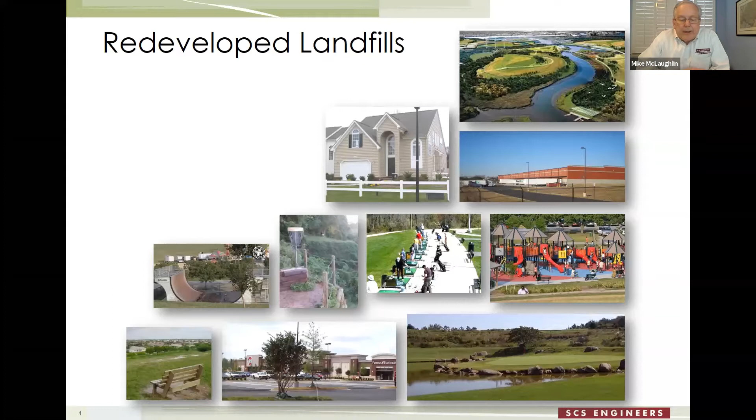I've said that landfill redevelopment can be smart growth. I think that's because landfills are often near great highway access. That's one reason why the landfill's there. There's existing infrastructure there - all the kinds of utilities and so forth are often built out to landfills. And they sometimes resemble or represent the last land available in an area. Suburbs or even urban areas have grown out around landfills - they're some of the last large parcels of land available.

I think also that landfill redevelopment can improve the care of landfills post-closure. Most regulations require a quarterly site visit to see if the cover is doing all right. Well, if you have a shopping center on a landfill, people are there every day. If a hole develops in the cover, the management of the shopping center will hear about that pretty quick and will take responsive action to deal with those kind of issues. So I think landfill redevelopment can be smart growth.

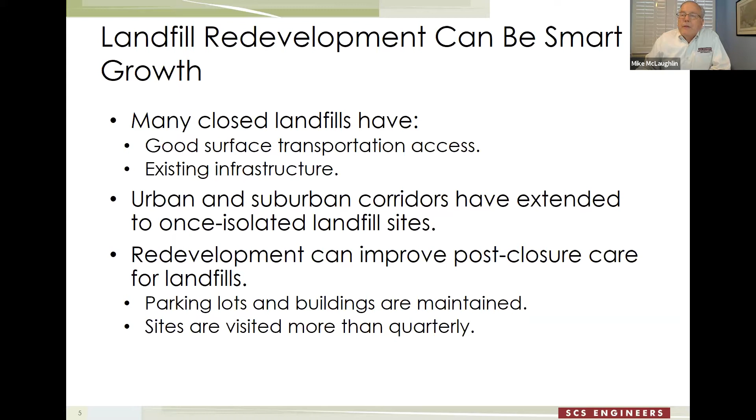There are three categories of challenges that I want to go over briefly this morning before turning it over to Eric and to Mark for some case studies. First, I want to talk a little bit about legal issues, because a lot of potential landfill redevelopers are struck first by the legal issues involved in these projects. Then we want to talk about some technical issues, primarily gas mitigation and foundation settlement. And I want to talk a little bit about costs, although costs kind of fall into two buckets.

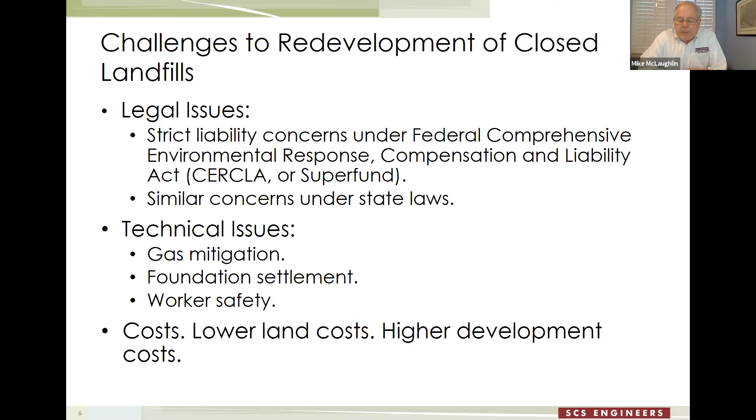On the one hand, it does cost more to redevelop a landfill. There are some features that you have to build in that you wouldn't have to build into a greenfield development. But on the other hand, you're buying the land typically for much less than you would be buying a greenfield nearby. So you have to consider costs in that total context.

With respect to the legal issues, we have a defense to the federal Superfund liability that can otherwise attach to site developers and site owners - a defense that is relatively new and has been successfully used. The bona fide prospective purchaser defense requires a few things to be present for the landowner to be able to use this defense. For one, the disposal of the site had to have been before he or she took title to the facility. They had to have undertaken all appropriate inquiries into the prior uses of the site, for example to find out that it had been used as a landfill.

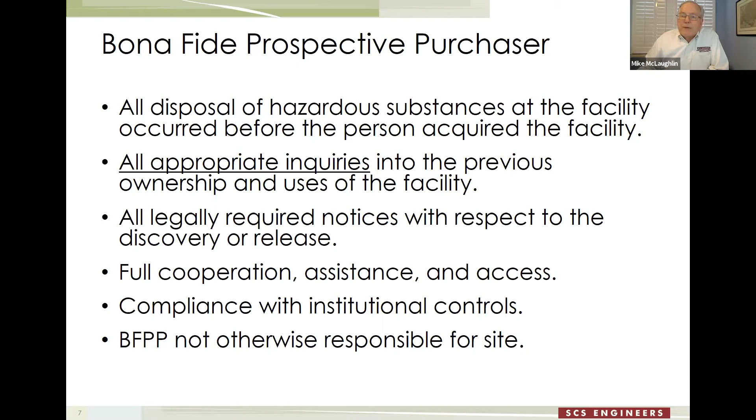You've got to comply with the institutional controls and essentially the regulations that apply to a closed landfill, which varies obviously from location to location and from landfill to landfill.

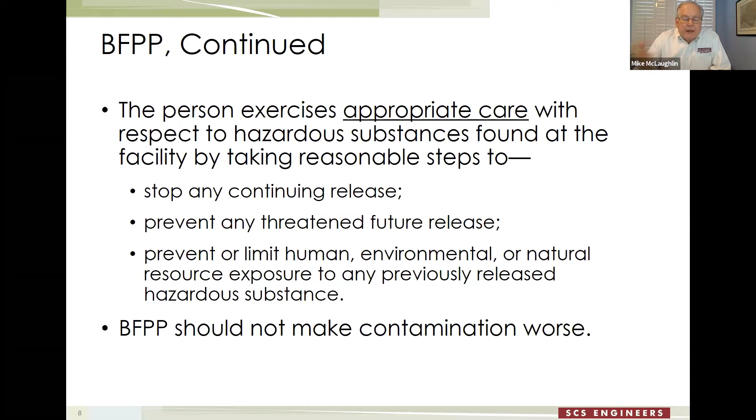You also have to exercise appropriate care with respect to the things you know about the site. That can mean stopping things like drums that are leaking on the surface of the ground. But really, what you want as a BFPP is not to make the contamination worse at a site. The idea is you don't move things from contaminated areas to uncontaminated areas, don't let things leak into wetlands, and don't make the contamination worse.

First, among the technical issues we have to address in many landfills are foundation and settlement issues. Depending on the nature of the waste, how fresh it is, and how much organic material it has, you're going to see decomposition and settlement over time. If the waste was placed years ago, there's perhaps less settlement; if it's relatively fresh, probably more settlement.

In general, it's not easy to use models to predict these things. It's better to go out and measure them in the old engineering way. We found that measuring actual settlement is the way to do this, and there are easy ways to do that relatively quickly that can get your arms around those parameters.

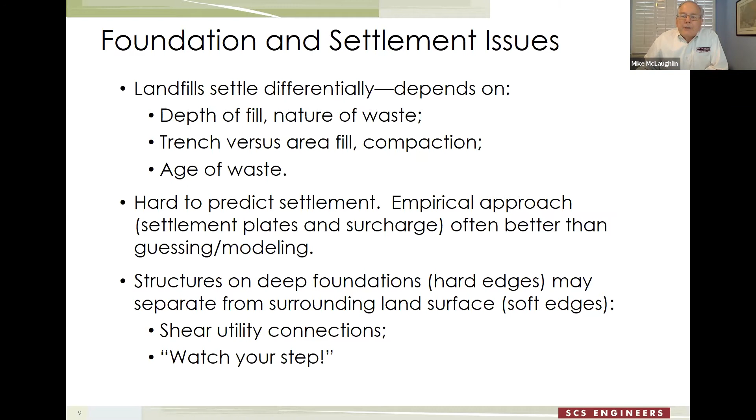We normally at least consider putting heavier structures on deep pile foundations. That can set up a challenge when the building is not moving but the ground around it is. So you've got the potential for a fall out at a building entrance if you're not paying attention, and the potential for utilities to shear off when the ground around the building settles. You've got to plan ahead for those kinds of issues.

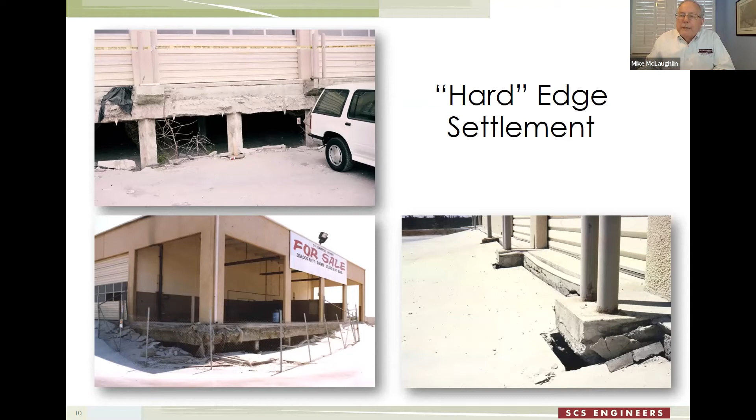In addition to that hard edge settlement, there's a soft edge settlement which can interfere with things like drainage. At Virginia Tech, they taught us that water wants to flow downhill. That's fine, unless the land has subsided and there's now a pond where there used to be a grade to promote runoff.

There are proven techniques for addressing these issues, everything from shallow footings and slabs to deep foundations with driven piles, grade beams, and structural slabs. We also can put in plastic grid reinforcement to minimize differential settlement at the surface. And we can improve the ground using either surcharge, a time-honored approach to loading the site so it accelerates settlement, or deep dynamic compaction, which we'll talk about in a second.

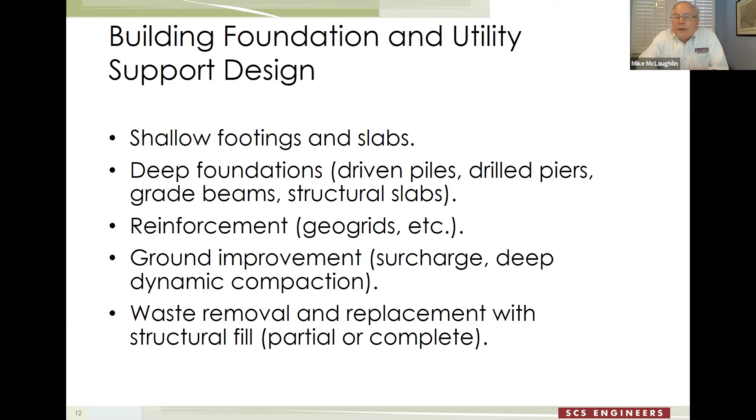I'll put this at the bottom of the list: it can be suitable for some sites to remove the waste and replace it with structural fill, which can be a pretty expensive operation, but certainly can be appropriate for some kinds of site developments.

One question we often hear from regulators the first time we talk about driving piles through a landfill is, won't this create a direct pathway or conduit for contamination to move further into the earth? The short answer is there are answers to this - there's some science and research out there that we bring to their attention. In terms of direct displacement, that's really a very low probability, since there's not much of a footprint that the pile has that can carry waste deeper.

In terms of a conduit, when you drive a pile through a clay liner, for example, you actually make the clay denser right next to the piling. That means there's actually less likelihood of leakage right around that more dense clay near the edge of the pile. If we use timber piles, though, there's potential for wicking, which could draw some contamination deeper.

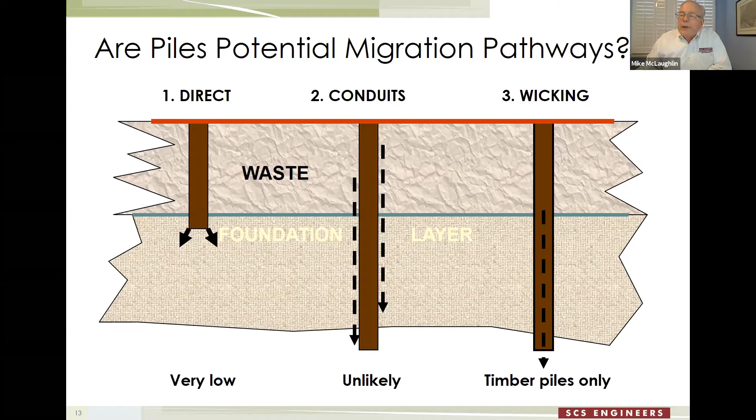I mentioned earlier that one of our concerns is planning for settlement so utilities don't shear off. Here are a couple of details on how that's done. We also want to protect piping beneath the slab of our building. We often hang those on hangers to keep them from moving - if the earth wants to slide or settle below it, we plan for that settlement and make sure our utilities stay in place.

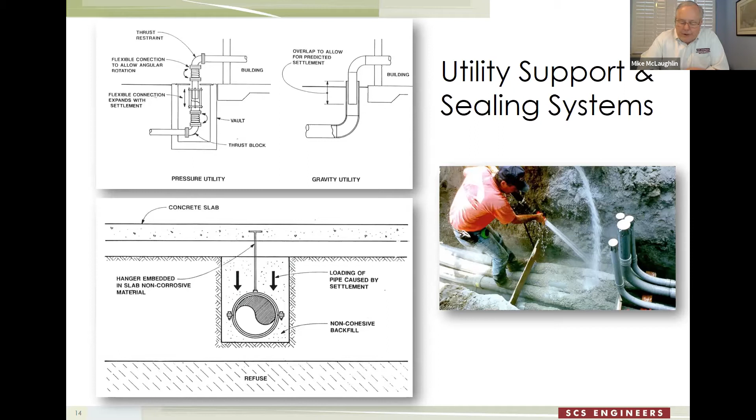A related concern has to do with bringing subsurface utilities onto a landfill site. The trench constructed for utilities can serve as a preferential flow path for migrating landfill gas. So we often construct bentonite check dams in those trenches to make sure gas can't move off-site.

Deep dynamic compaction is essentially a brute force method - it's like taking a large hammer and pounding the surface of the landfill. If you do that enough, you can actually have effects down 25 to 30 feet deep in a fresh municipal solid waste landfill. It's a good technique for near surface stabilization and works best on flat areas; doing it on side slopes can be challenging.

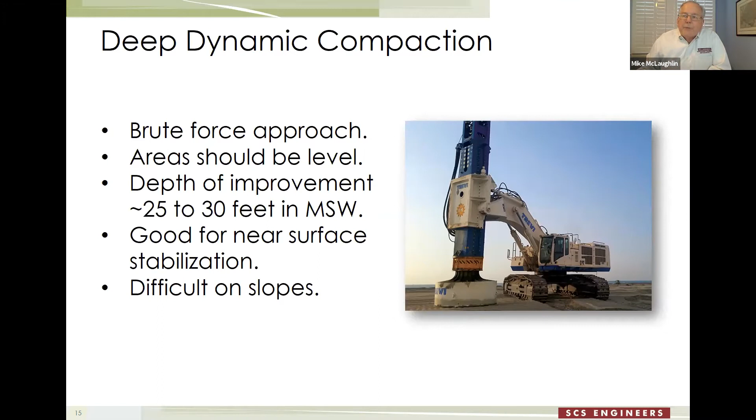What makes this a problem is that if you have an enclosed space collecting this decomposition gas, with oxygen present and a source of ignition, you can have an explosion. Explosions happen every year somewhere in the world. There are decomposition gas explosions, and people have been hurt from those explosions.

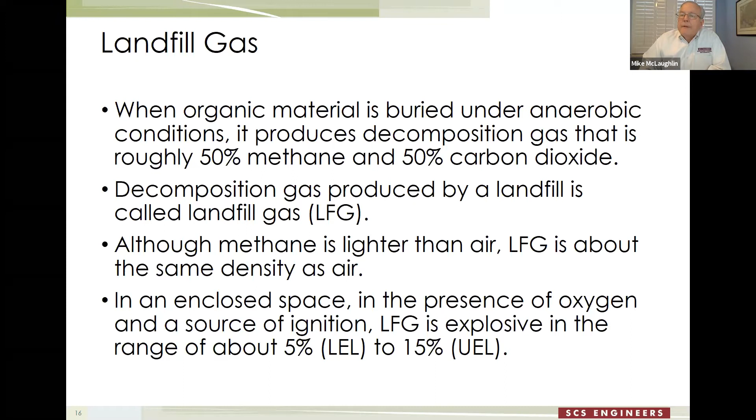When gas is produced very rapidly and has not much room to spread out in the subsurface, you can see pretty substantial pressures build up, and those pressures can drive gas into structures. Where you have a lot of gas being produced and a lot of pressure, you've got a different kind of challenge than if you simply have diffusion or concentration-based migration. If you have sustained pressure in the subsurface, that's a different challenge.

In addition to pressure, we also care about how much methane is in that decomposition gas. Obviously that matters, and the regulations focus on gas quality, for example.

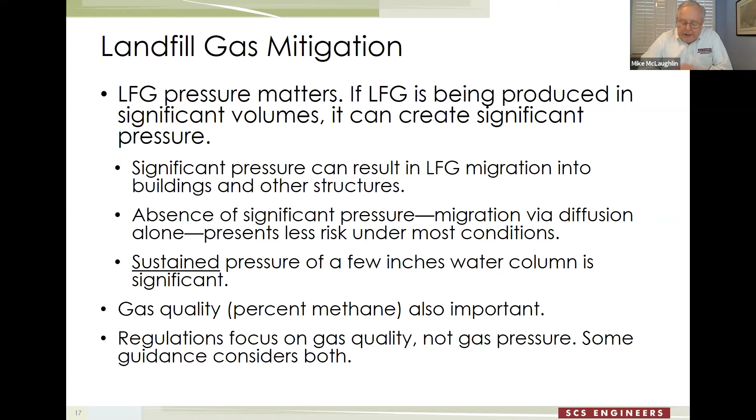There are lots of proven approaches to solving the landfill gas challenge at sites. I first want to put a caveat out there: there's a whole separate webinar we should have on trace contaminants, trace chlorinated solvents that might move up from contaminated groundwater into structures. Some of the technologies are similar, but that's a completely different subject. What we're talking about here today is landfill gas mitigation.

We normally have several techniques available to us. We can passively vent landfill gas from around our building. We can put in membrane barriers, or a combination of passive venting and membrane barriers. And if enough gas is being produced, we can supplement those techniques with an active subsurface subslab ventilation system.

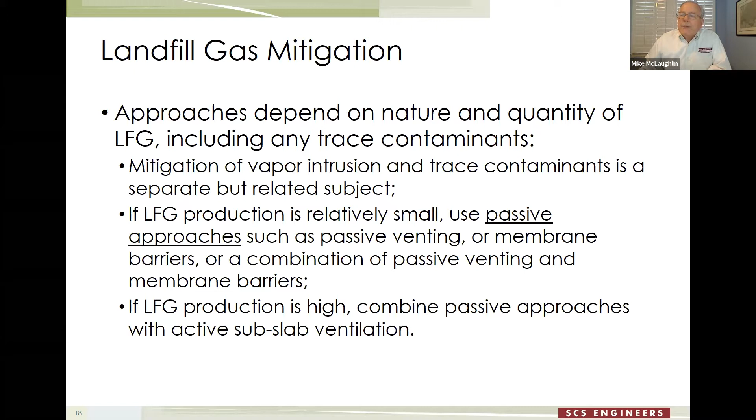In our experience, a lot of our landfill redevelopers take a belt and suspenders approach to mitigating landfill gas. They will put in both a barrier and a venting system and active ventilation, even if the situation wouldn't technically require it, and all of that is fine. It is a little bit of a challenge operating blowers around the clock. Some of our more recent systems have pretty sophisticated controls that only turn on the blowers when they're needed, and when there's methane there to be swept out of the subslab.

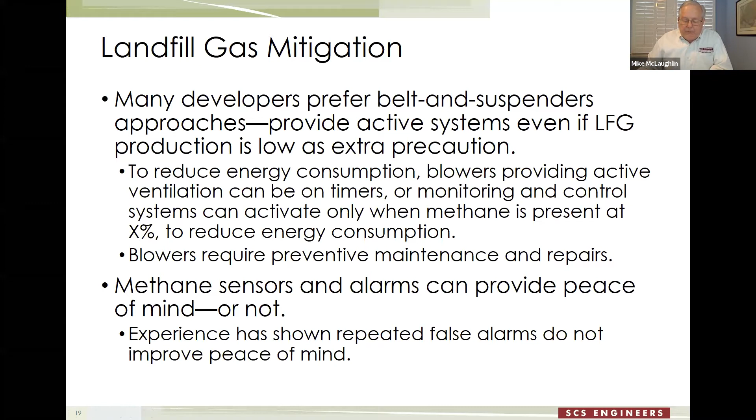Alarms are very popular. People like to put sensors and alarms in buildings as one more layer of protection. They can provide peace of mind, or as I say on this slide, or not. False alarms don't provide peace of mind. What they tend to promote is disconnecting the alarm, in our experience. But there are ways to minimize the potential for false alarms, and thus increase peace of mind.

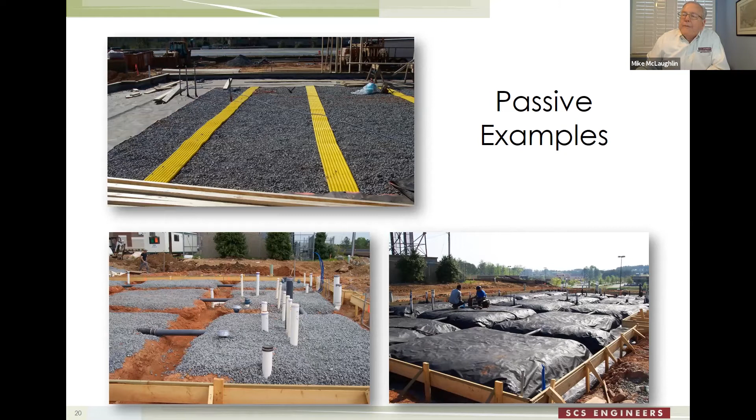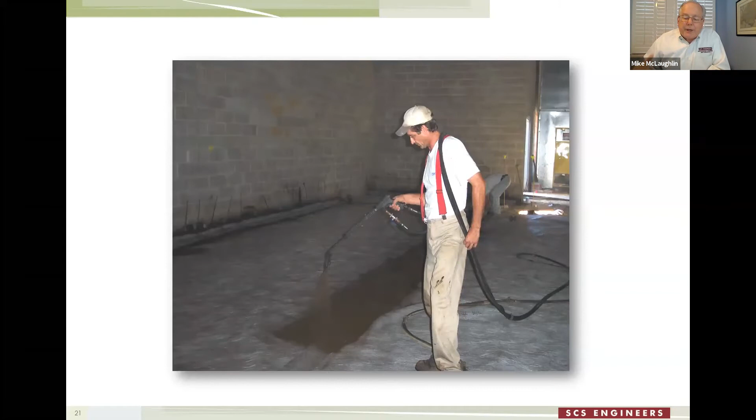Again, passive systems in that application - sheet membranes are pretty good. We also have had good experience with spray applied asphaltic membranes. This is somebody putting down a Liquid Boot from CETCO. It's basically built and fabricated in the field, and subject to separate construction quality assurance.

I'd like to speak very briefly about construction worker health and safety issues. Some of these old landfills date to a time when hazardous waste regulations weren't in place. There can be surprises - there could be industrial waste in some older landfills. It's just something to be prepared for.

Preparation is the best part of good luck, I think. You'll want to have a written health and safety plan for the people doing work invading the old landfill. You want to do some air monitoring to make sure they're protected, and have contingency plans in place in case they bump into something you weren't expecting to bump into.

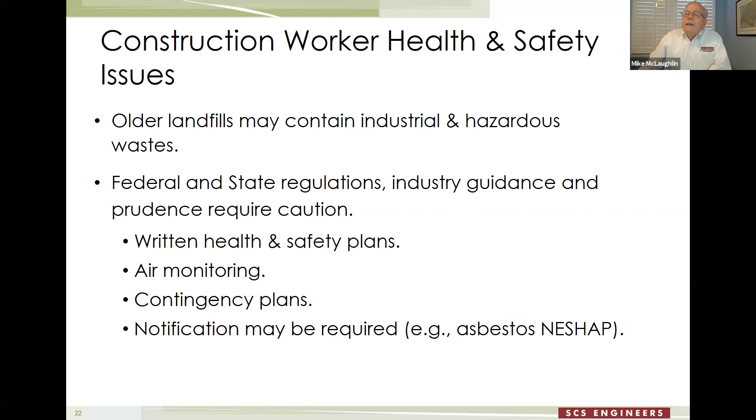I want to talk just a little bit about the incremental cost of developing on top of a landfill. Doing things like structural slabs and deep pile foundations can add expense to the construction. Again, you've offset that in theory by the lower purchase price for the land. Deep dynamic compaction's got a cost associated with it.

Putting in gas protection systems can add a few dollars a square foot for the first floor square foot area, and if you add ventilation to it, that can add some additional expense. And then just in general, you put in a little more money for things like maintaining parking areas, because instead of having to repave those every 10 years, for example, you might be repaving them every 7 or whatever the case may be.

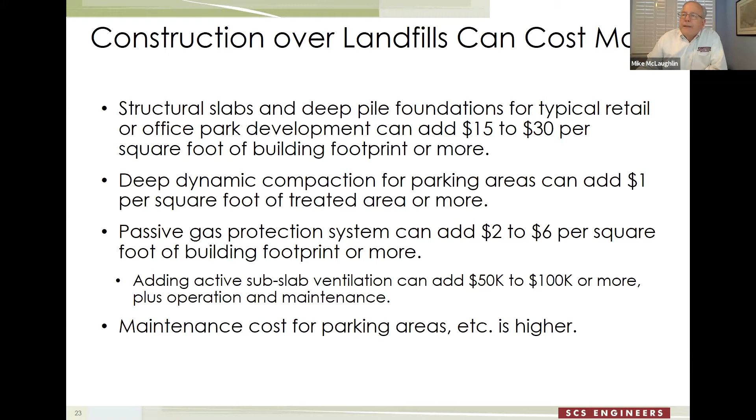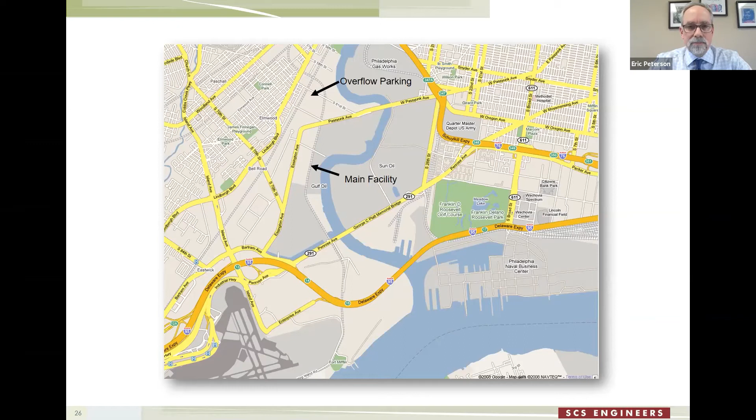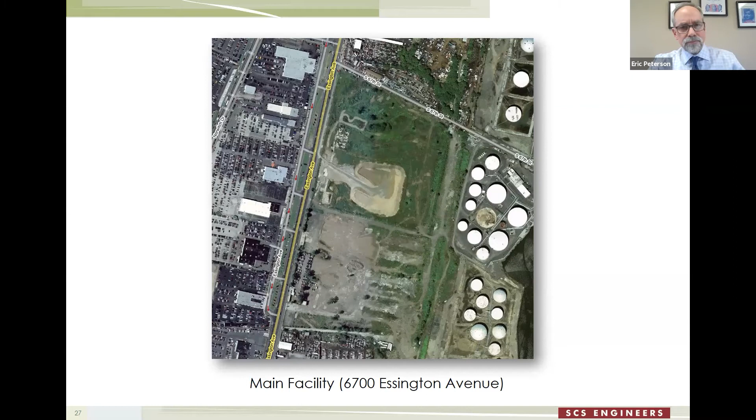The location of the facility, we're talking about landfills. I call this more of a junkyard slash construction debris landfill. This is a pre-development photograph of the area. The site is about 50 acres, half of which was landfill material, 15 to 25 feet deep.

The previous consultant did a series of test pits and monitoring probes, as you typically would do. They found methane in the 50% range, slight pressure. I should point out that no matter how old or how little organic material you have, the microbes are still going to produce it at, in the 50% range. So we've worked at sites in Alexandria from the old canal that was filled 80, 90 years ago, but there's still 50% methane being produced, just in very, very small quantities, which then results in low pressures and certainly factors into the hazard level that can develop.

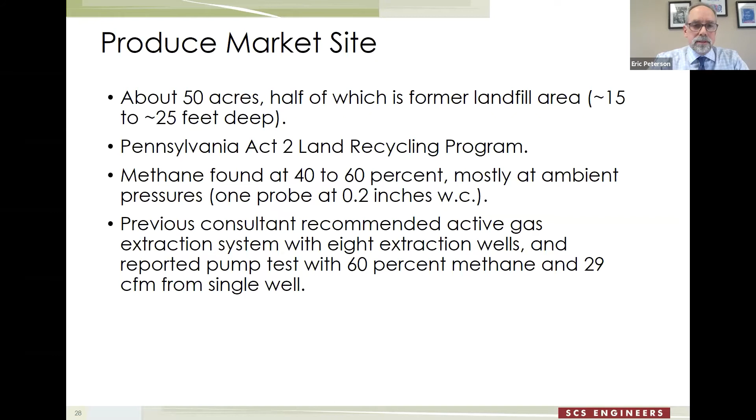For this site, we found very little pressure and weren't anticipating a whole lot of gas generation. We modeled that about 80 CFM would come from the entire site. So although there was a recommendation by the previous consultant to perhaps install vertical extraction wells to remove the gas, that's a challenge for a couple of reasons. One is with a building this size, over 500,000 square feet, it'd be difficult for vertical wells to influence beneath the building, and also you introduce the possibility of air permitting if you're going to extract gas in that manner.

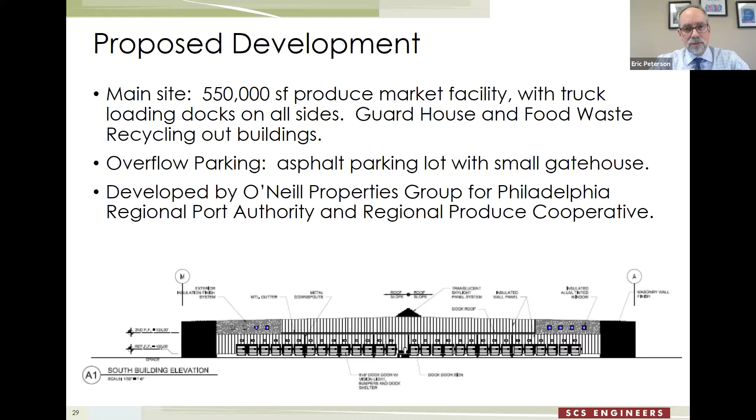As shown here is sort of an architectural rendering. There's a large building with truck loading docks on all four sides.

In this next slide, we discuss the type of construction it was.

Originally, it was going to be supported on timber piles. As Mike mentioned, on a pile foundation you're supporting a structural slab which is independent of the soil beneath, so the soils can settle with the waste below it, independent of the first floor. This creates a challenge not only for the utilities that need to be hung from the underside to keep them in place, but also if you're using sheet membrane, for example, that needs to be attached at the edges, and it ends up draping over the utilities.

You also have the added challenge of each pile having a pile cap or cluster of piles to support the slab and also the columns above it. So each pile cap creates a sort of detour for utilities running across the building, and it's also a point of attachment for a sheet membrane.

So normally, if we have a deep foundation and structural slab, a spray-on type membrane has a lot of advantages. However, at this site, the value engineering during the design process determined that controlled modulus columns, which are a combined auger grout injection process to modify the soil, sort of like concrete columns, were installed very close on center. At this particular site we had approximately 10,000 columns, and above that a 3-foot layer of engineered fill that allowed for a slab-on-grade type construction, which simplified matters for the methane remediation.

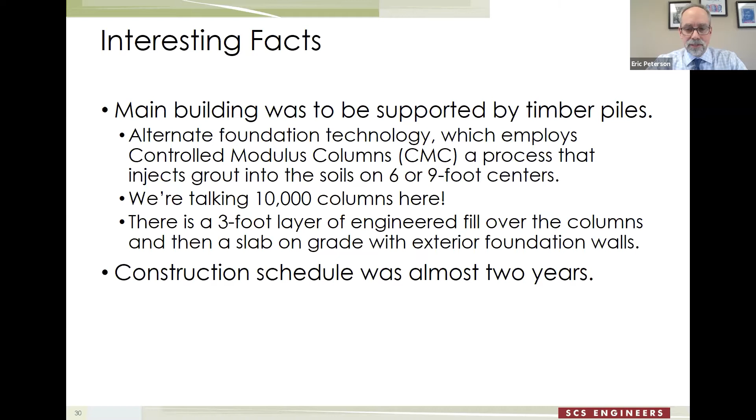The construction project was about a 2-year process.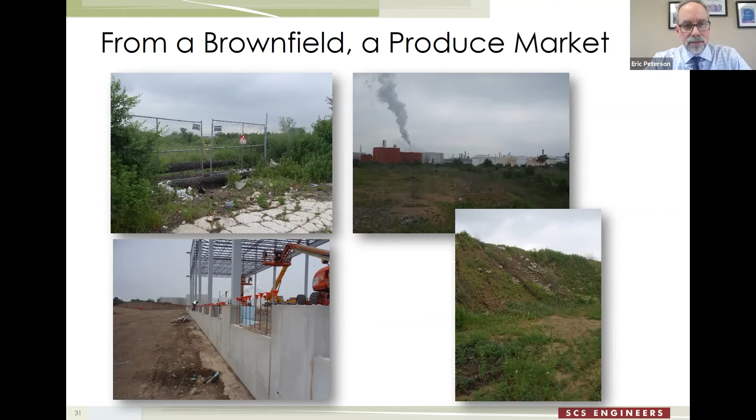Here's a couple of pictures pre-development on the top left, right, and bottom right. And then in the bottom left, you can see some of the earlier phases of construction.

In regards to the methane mitigation, we had, from bottom to top, a gravel vent layer, the membrane, and then the concrete slab, with vent piping in the gravel vent layer.

It's noted here that originally, when we were talking about a deep foundation, the spray-on membrane was proposed. When they switched to a shallow foundation, the membrane supplier determined he could use sheet membrane more economically, so that's what was installed.

As I'll point out in a minute, sheet membranes require a boot for every penetration, whereas with a spray-on, you're creating the boot with the spray itself as you go. This large building had many penetrations with conduits and utilities, plumbing and whatnot, each of which had to be booted. I'll show a few slides in a minute on how we structured the remediation.

We had vent piping that crisscrossed the building. Every other run of vents were connected to a manifold that in certain places would go up to the rooftop. We had a series of 4 blowers on the roof to apply an active vacuum beneath the slab. Every other cross vent would go to a different manifold that had a series of vents along the loading dock as fresh air inlets, so that in active mode you'd be flushing clean air through, pulling it through the subslab gravel layer to remove any accumulated methane.

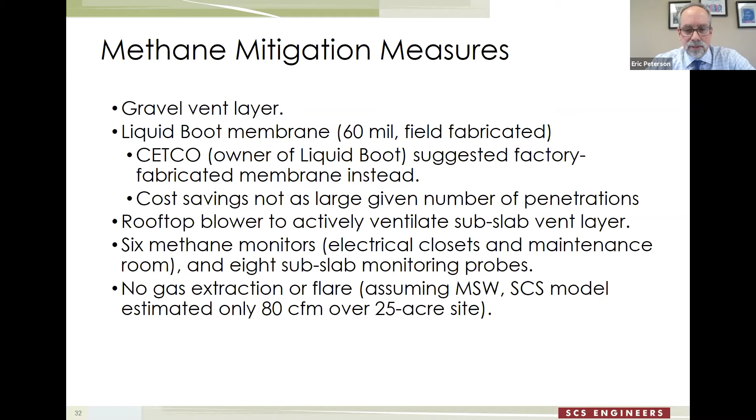You'll see in these pictures different sequences of construction. On the top left is the beginning of the gravel layer. You see the white pipe along the left side is one of the manifolds I spoke of.

The gray ribbon-looking thing in the lower left of the upper left picture is a geovent type venting device that ran across the building the short way. The next picture is the completed gravel layer, with the dark material being the protective geotextile and the shiny material being the membrane, and a more full picture of the membrane deployment is in the lower left.

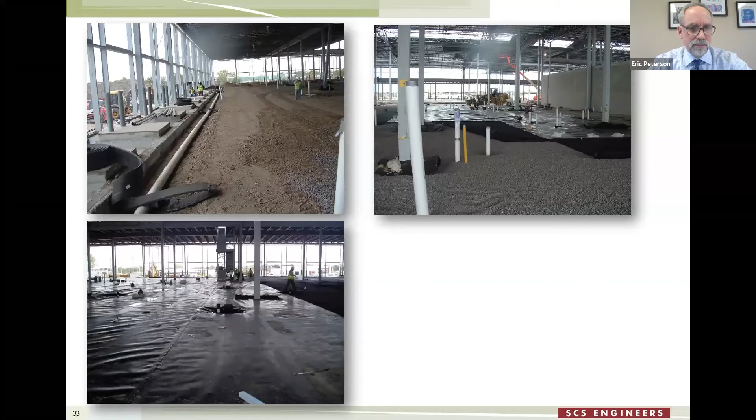I mentioned that we had a series of 4 blowers on the roof. We ended up activating these, running them full time. Here's one of the 4 blowers. You can see the refinery I mentioned in the background.

Besides this main structure, the 500,000 square foot structure, we had a guardhouse and a recycling building. At the guardhouse, the design called for the membrane passive venting through the roof. It was probably about a 600 square foot building, but it had a lot of telecommunication cable conduits coming in through a small communications closet and causing odors.

There were 3 large spare conduits where gas from the subsurface was coming in and causing an odor. So we ended up modifying that design. In addition to your belt and suspenders, we added an elastic waistband by having an interior ventilation fan that was sensor activated in this telecommunications closet.

We also made the passive vent active by putting a radon style fan on the vent piping through the roof. Even with all these things in place, membrane, vacuum applied through the vent layer, you still have one critical pathway that you need to control, and that is through penetrations of conduits and utilities that come up from beneath the slab into the building.

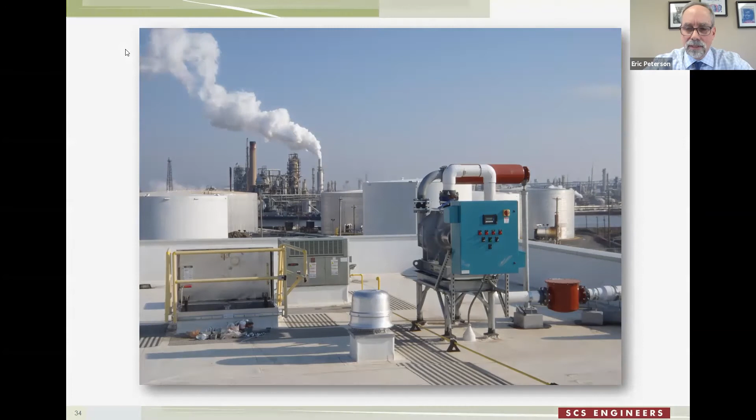Here, this gives you an example. At this site, there must have been several hundred conduit penetrations coming up through the slab. The picture on the left is just one bundle of conduits in one small section of the building. After the building was open, before occupancy, we were testing the sensors, and we had an alarm going off that we determined was coming from the conduit bank near the elevator shaft.

You can see on the right, these are conduit seals. Every conduit, because they're not gas tight and methane can get into them as they run beneath the building, needs a seal installed, which is like an epoxy between the conductors and the conduit to block the methane, otherwise you can have a leak. Well, the contractor forgot to install that epoxy.

In the second from the right seal, you can see there's a little bit of drippage from it coming in after the fact. So we put in the epoxy, which stopped the alarm, and we haven't had any alarms since. So just a note of caution that quality control and little things like conduit seals are something you really need to keep track of and make sure are installed properly.

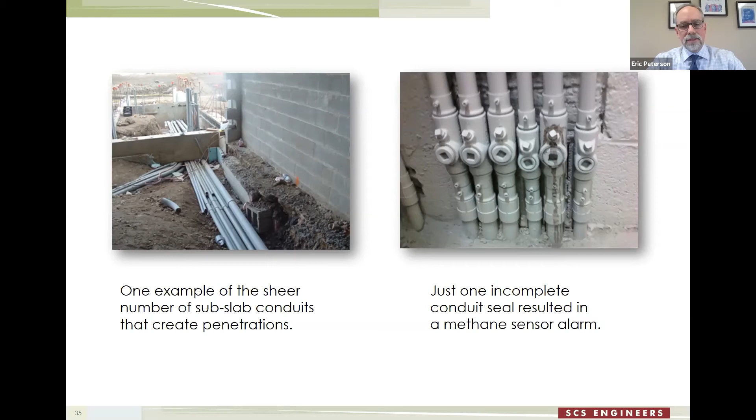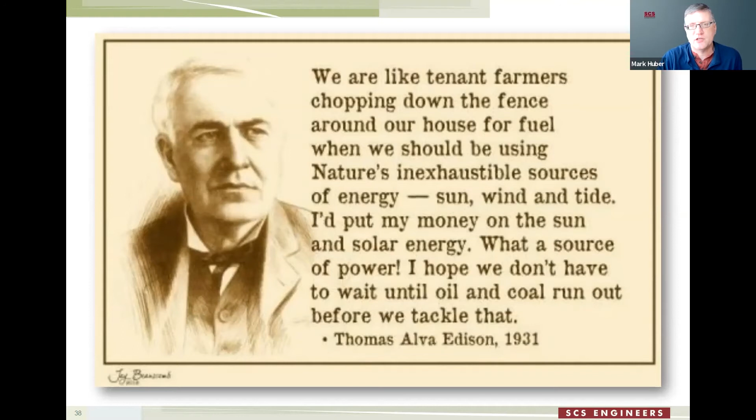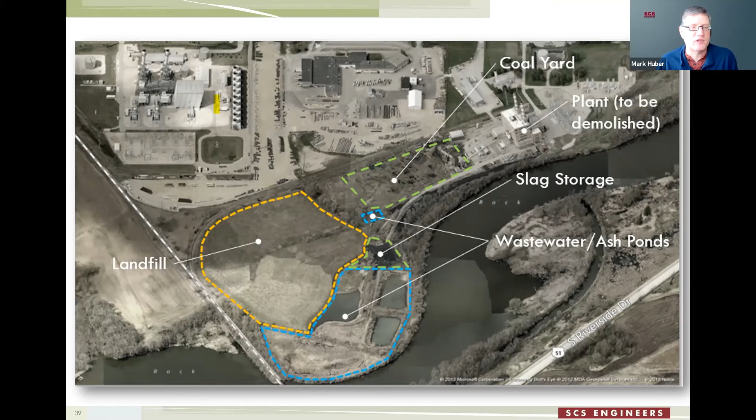When the boilers were running under coal, the ash material created from burning the coal was mixed with water to be conveyed out to several ponds over here. The ash material would settle to the bottom, and the clean water would go off the top and into the Rock River. Over time, the ash would accumulate in the ponds, and it would be excavated, dredged out of these ponds, and then placed into the landfill.

The coal-fired plant ran for almost 50 years, was eventually converted for a short period of time in 2000 to a natural gas-fired plant. Then starting around 2012 through 2016, the plant was decommissioned, the ponds were closed, and solar was installed on the landfill.

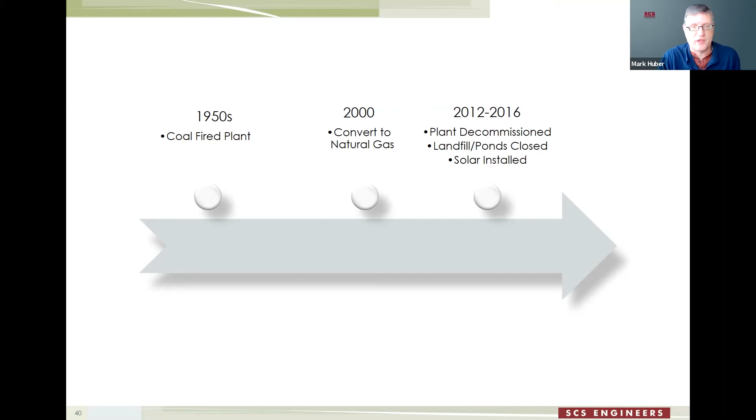Anytime we're looking at redevelopment on a landfill, there's really two basic questions we need to ask. How does the landfill affect the development? And really the flip side of that, how does the development and the construction that goes with it interact with the landfill?

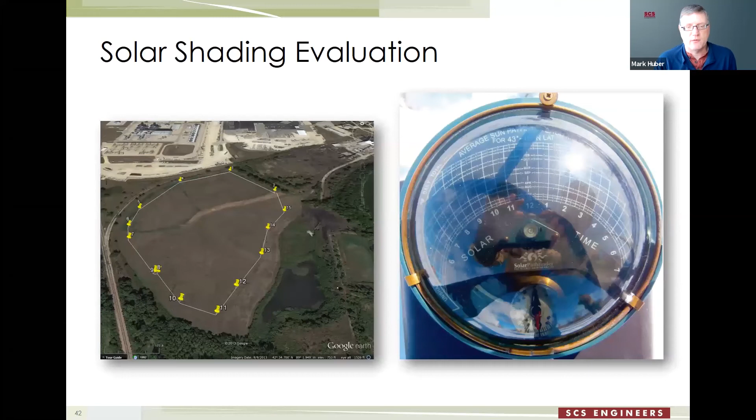On this site, we started to answer those questions by first looking at the feasibility of solar on the site. The instrument on the right-hand photo is a solar pathfinder. You just take that out to the site and walk around with it and measure the angle of the sun and determine how much energy you'll get. You're basically looking to see if there's heavy shading that would obscure the panels and reduce their effectiveness.

While we were walking the site on a very cold day here in Wisconsin, doing the solar pathfinder work, we observed a lot of condensate coming off that natural gas-fired plant, and we were a little concerned that that might cause some shading. So we did a quick little wind study. As you can see here, the prevailing winds out of the west were blowing the condensate away from the solar facility and would not cause a major concern in terms of reduced electricity production.

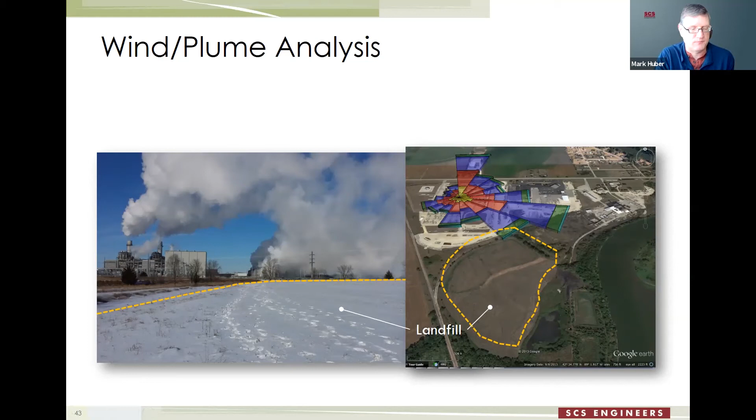So once it was determined that solar was probably a good thing to try at this site, our client Alliant went off to recruit a solar developer and asked us to start working on a plan to close out the coal yard, the ponds, and the landfill.

So our primary mission was to take the coal and dirt that was left over from the coal yard, as well as residual materials in the ponds, and consolidate them with part of a closed landfill and then what became a new landfill. The trick here was the volumes of those materials are a little uncertain, so we had to have some flexibility in our grading plan so that cover could go up or down based on the final volumes of material moved during construction.

At the same time, we needed to make sure that the grades of the landfill were ready for solar, so we needed to make sure those grades were between 2 and 10%. We don't want anything too flat or too steep for solar. And we weren't looking to put solar on the steeper 4-to-1 slopes that we needed to make a couple of transitions.

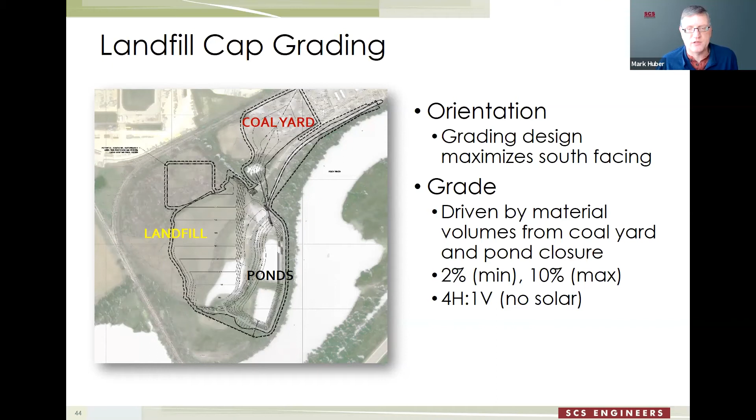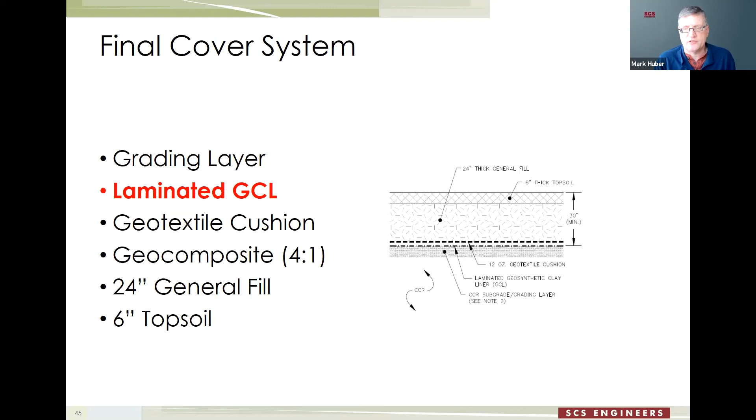The final cover system for the landfill, once all the materials were consolidated, consisted of these layers. The most important, the queen bee of this, is a laminated GCL, or geosynthetic clay liner. That's some clay sandwiched by 2 geosynthetics, and then for extra protection, this one has a membrane applied to that GCL. I have a series of slides here showing the GCL going down on top of the landfill.

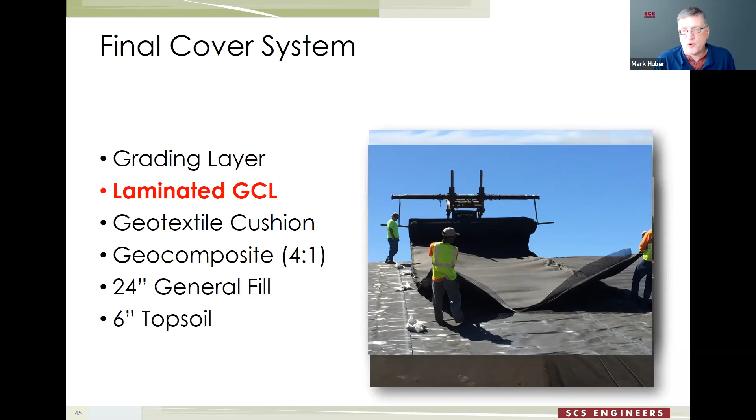And then just a protective geosynthetic going on top of that. On the steeper slopes, we had them roll out some geocomposite and a drainage layer that we'll take a look at in just a minute. And then finally, we put on a fairly thick 24-inch general fill. That's often called a rooting zone. It allows the roots on the cover above a place to go so that they don't penetrate the cap over time.

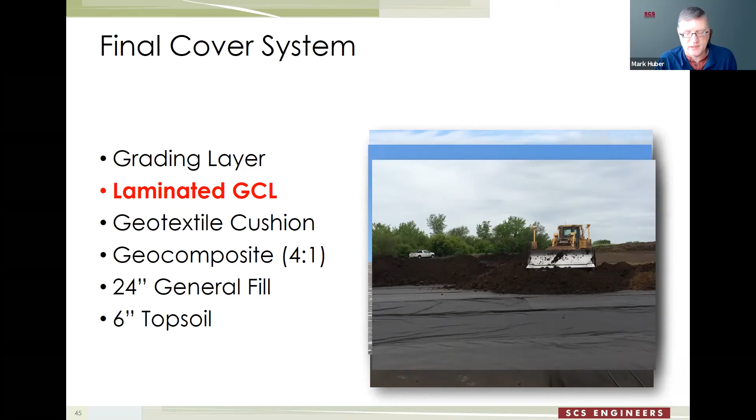The main point here is that the stability of the landfill cover was really important. We wanted to make sure that we didn't lose the cap itself down into the pond below, and we certainly didn't want to lose any of the solar panels that were about to be installed on it. So that drainage layer was installed on the steeper 4-to-1 slope so that when the rainwater hits the cap, it has a place to go laterally instead of vertically.

The function of the cap is really there to keep water out of the materials below so that they can't mix with the rainwater, can't mix with the waste, and then cause a groundwater problem down the road. So this drainage system helps manage that storm water that does hit the surface.

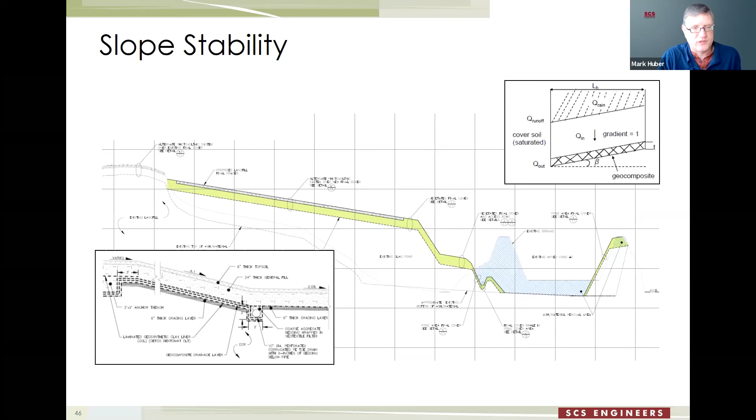One of the next big hurdles for this project was making sure that the loads of the construction of the solar system wouldn't impact that GCL layer. What we found out during the design is that the panels themselves have very little weight. In fact, the concrete grade beam that was installed to mount the panels on was actually serving more to make sure that the wind loads didn't topple over the panels than it was there to really protect the cap below.

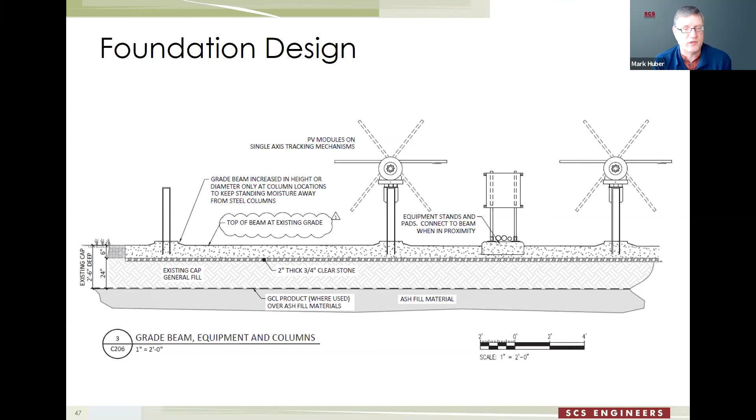In addition to the solar panels, there's some other equipment that got mounted on the grade beams. We're depicting here one of the pieces of equipment called an inverter. The solar panels collect energy in direct current, and that has to be converted to alternating current so that it can be used on the grid and brew our coffee and reheat our meals in our microwaves.

In addition to the grade beam that went on the cap, we did have a few places where we had to have some underground utilities. The main goal there was to make sure that those conduit runs were kept shallow enough that they didn't interact with that GCL membrane.

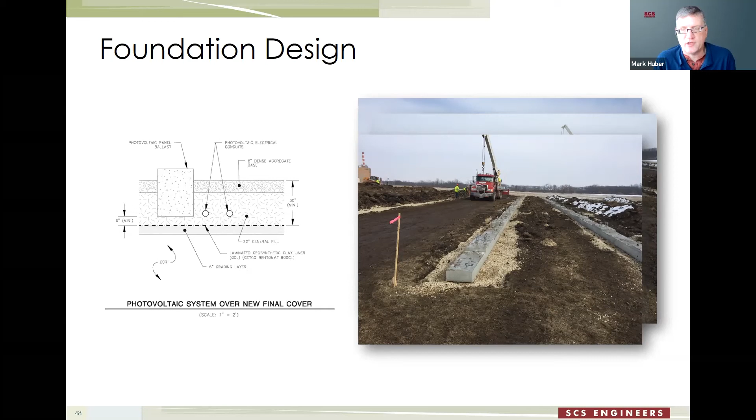One of the innovations the contractor came up with on this project was to pour the grade beams offsite in their yard, then bring them to the site on a large flatbed trailer and use a small crane to put them in place. That was a good way to minimize the loads and traffic on the cap while the solar facility was being installed.

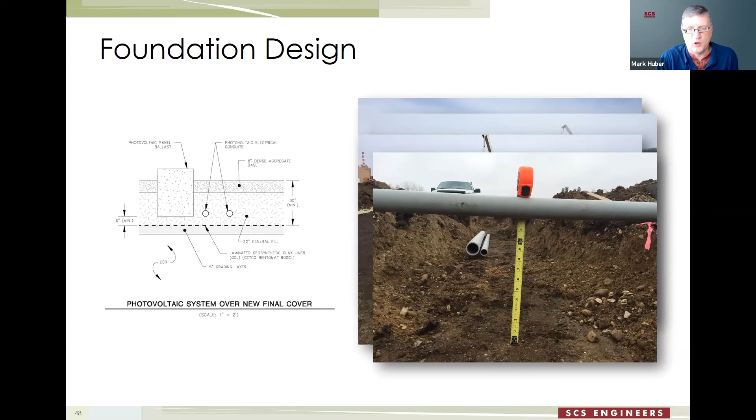Maybe not quite as interesting as the solar panels themselves, but site access over the top of a cap is an important consideration. We had to do some geotechnical analysis to make sure that the vehicles that would need to go on the cap to help maintain the solar system would not disrupt the cap, particularly that GCL layer. So we did some conversations with the solar developer and the local emergency departments to find out what size vehicles would be up there.

Turned out they were pretty light, and the road that we needed to put in didn't need to be too thick to support those vehicles. So we were able to have a fairly shallow road section.

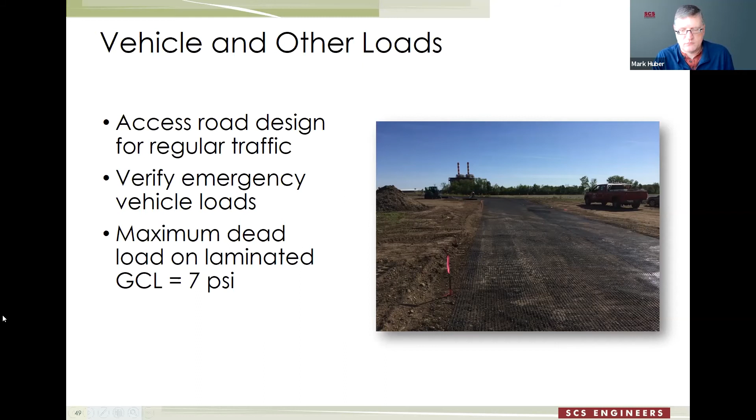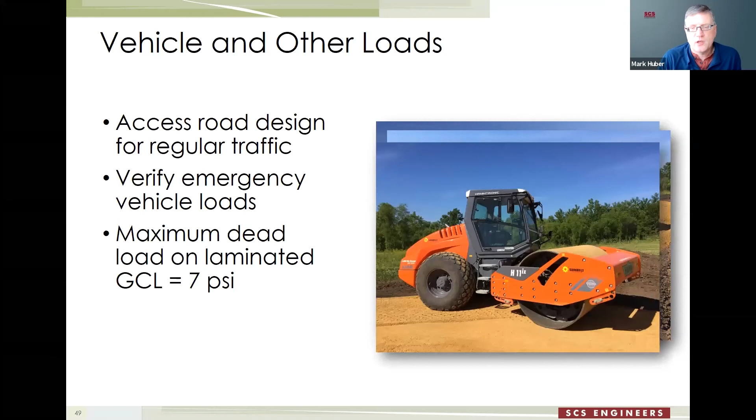Here's just the gravel being put out with some wide tracked vehicles so that it doesn't disrupt that GCL, and then a compactor pushing it down into the ground. And there's the final road.

Stormwater management is always an important consideration on any development. In this case, we were able to protect the cap with some good sloping away from the high to low points. We had a pond that was actually a former process water pond. The easiest way to get that pond closed out was actually to turn it back into a pond after we got rid of all the contaminated material.

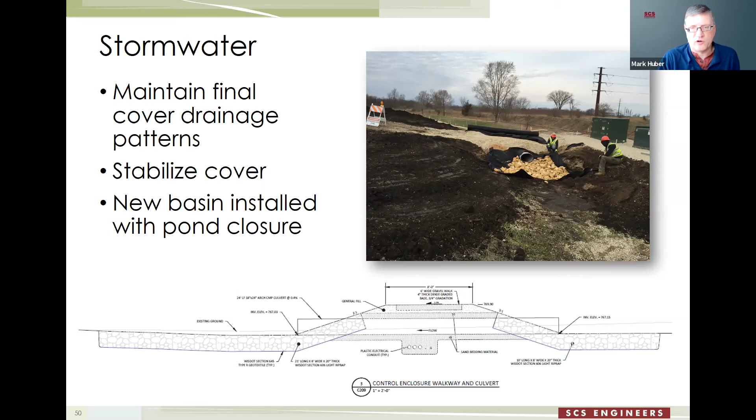In this case, we were able to use a conduit run, locating it directly under a stormwater culvert, allowing us to keep everything shallow and use the road that went over the top to get to the cap as a dual purpose.

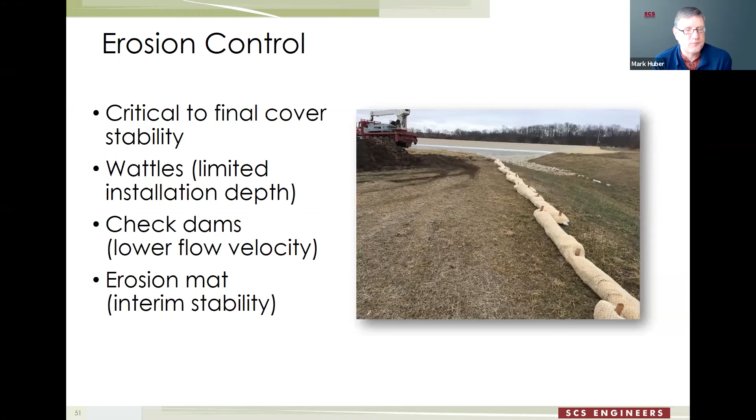Erosion control is really important before the vegetation on the cap is established. One of the things we used here was something called wattles, which serve the same purpose as silt fence, just trying to slow the sediment transport down. The advantage of wattles is that we just need to stake them a little bit into the ground, so we didn't get anywhere near the GCL layer down below. We also used erosion matting where water was being concentrated to keep that in place.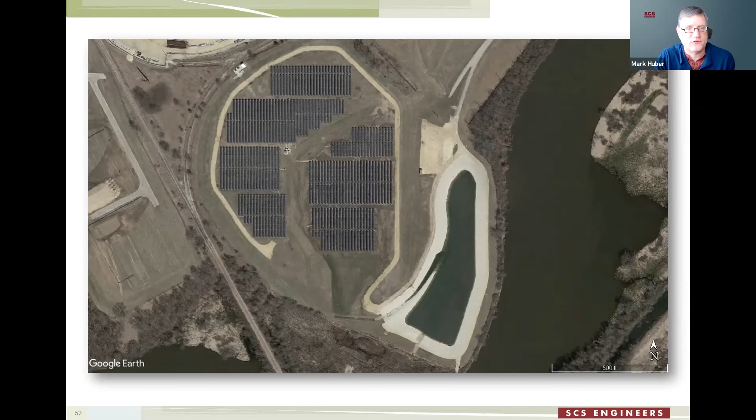So at the beginning of this case study, we were looking at two questions. Does the landfill affect the development? And we're able to firmly answer that question: no. The landfill and development get along quite well. We achieved a nice symbiotic relationship that we were looking for.

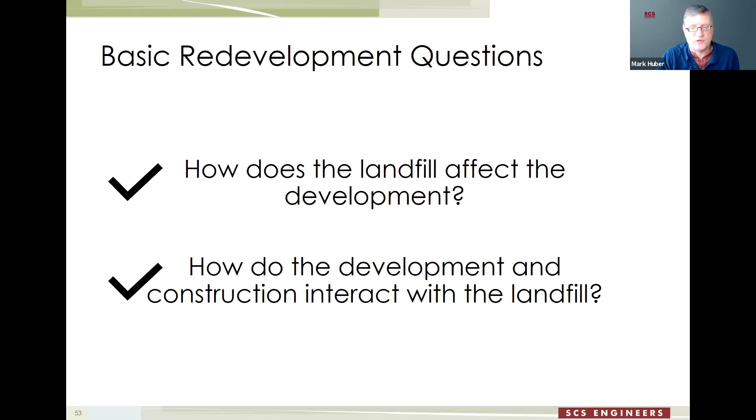At the end of the day, we ended up with 7,700 panels on the cap, which generate about 2.3 megawatts of electricity, enough to power about 400 Wisconsin homes. And at the time, this was the first utility scale solar project on a closed landfill in Wisconsin. Certainly, we hope it's not the last.

A couple of advantages of putting solar on landfills: particularly in the case of coal combustion residue or CCR sites, they're very close to grid infrastructure or the interconnect, which is where the power is taken from the panels and put into the grid. They have acres of open space, in this case that cap was about 14 acres, and it's really smart land use. There aren't a lot of other things you can do in some of these more rural electric utility sites, but solar is a great option.

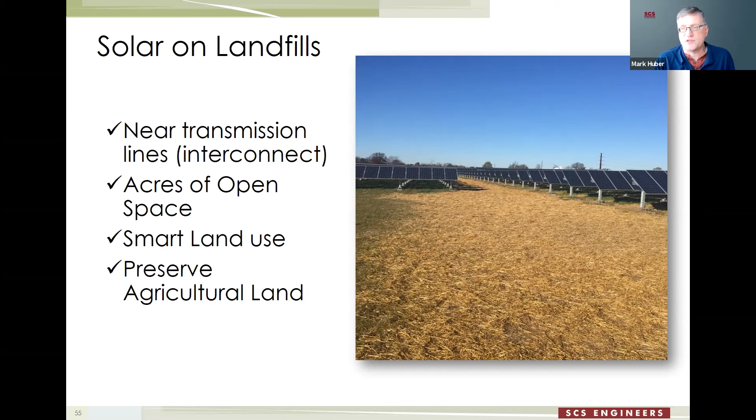And if you can put solar on a cap, certainly here in the upper Midwest, that is good for the farmers because they definitely like to see their farmland preserved.

Just to wrap up, there has been a lot of interest in more recent years in doing solar on municipal solid waste landfills. There are some strong financial incentives to do solar in general, and those also apply to solar on landfills. What we've seen so far is that the older closed landfills, sometimes affectionately known as the town dump, with their flatter surfaces, are really amenable to solar. The more modern landfills with their 4-to-1 side slopes are a little trickier, but we are starting to see some new products come online that look very interesting.

Those include some artificial turf. I know that some vendors are starting to embed solar panels right into that turf, so you can close out your landfill with the geomembrane, a surface turf, synthetic turf, and solar panels all at the same time, which can greatly reduce the cost of your cap and turn it into a money generator.

Also, we're seeing a lot of the older landfill gas to energy systems, particularly gas to electricity systems, starting to run out of their contracts or just run out of their useful life. Because those facilities already had an interconnect, a good connection to the grid, those landfills make a good option for solar because you can use that same interconnect and infrastructure that's put in place. And with the ever decreasing cost of solar panels, the option to put solar on landfills gets more attractive every day.

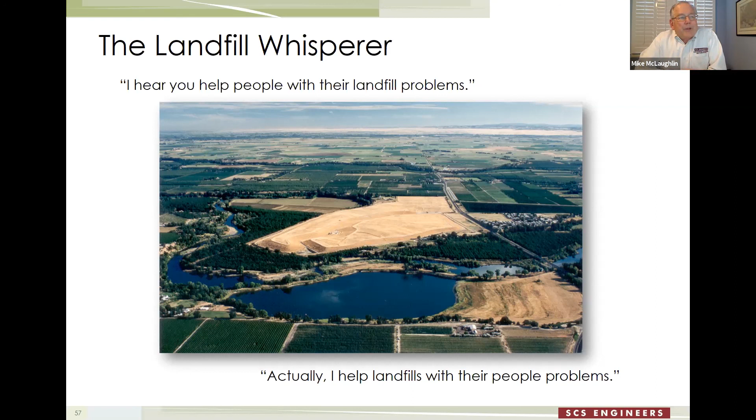I mentioned earlier that this phenomenon began, at least in my experience, in Southern California, but it's expanded to just about every part of the country. We've done these projects literally just about everywhere. There are some absolutely amazing projects done in South Florida, for example, just in the last few years that my colleagues in our Miami offices have been working on down there.

In the Southeast and Georgia, there are at least a couple we've been working on. There are quite a few here in the Washington metropolitan area and all up and down the mid-Atlantic. And then, as Mark has illustrated, all over the Midwest. It's not limited to just places where real estate prices are really high. It helps if real estate prices are high, but landfill redevelopment can be smart growth just about anywhere.

We do have scores of examples that we can share with folks. We have had to share with skeptical fire marshals and regulators who are worried about how these challenges have actually been overcome.

Before I finish up with my summary slide, we did have a question sent in. Have we worked on any dual use projects on closed landfills? A dog park underneath the solar panels? I'm not sure a dog park under solar panels is coming to mind.

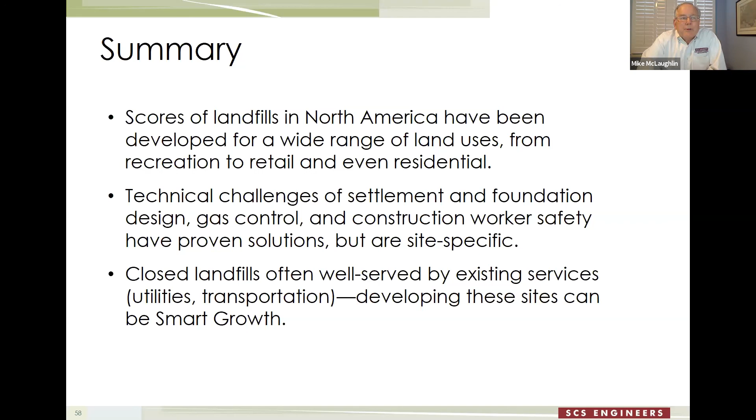We've been able to, and a lot of developers have been able to, do these projects successfully using some of these proven solutions. I think the fact that closed landfills are often well served by existing services, utilities, interconnects in the case of solar, and transportation corridors and the like, means these projects are almost the poster child for what I call smart growth.